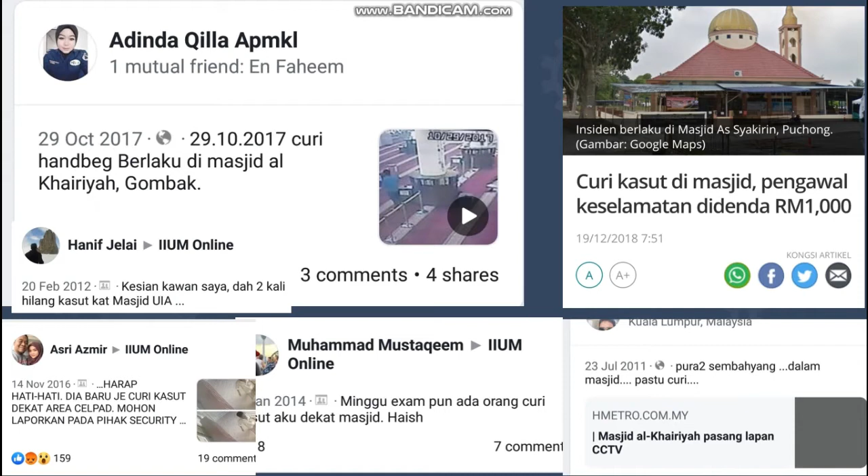Next, we move on to the next slide. This is the evidence that people always complain that their belongings got stolen. Many UIA students complain about their belongings getting stolen.

The product literature we found shows that ASRS is used to place and retrieve loads. It can also move in three-dimensional lattice structures. It is also more efficient and faster.

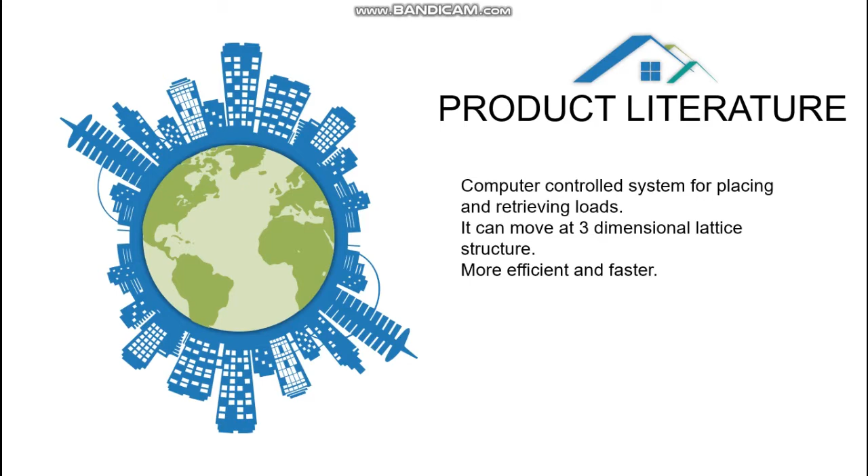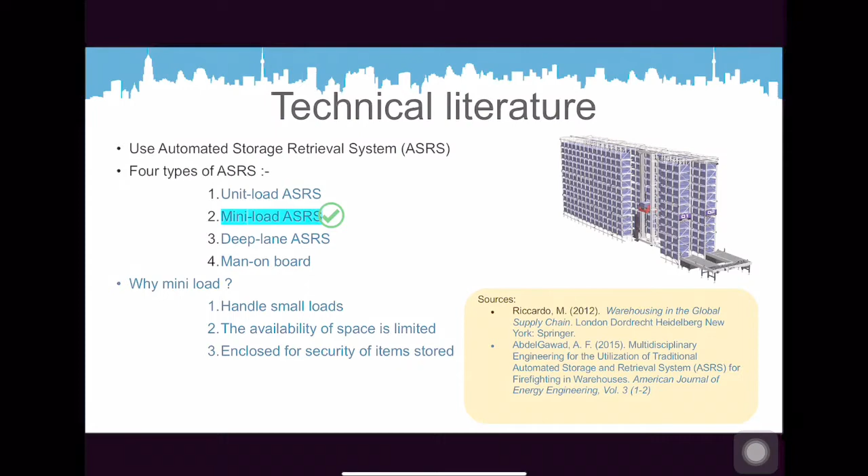Now I will explain about technical literature. The concept we found is automated storage retrieval system, ASRS, and there are four types: unit load, mini load, deep lane, and man on board. We use mini load because our product only handles small loads, the availability of space at mosques is limited, and it encloses the items for security.

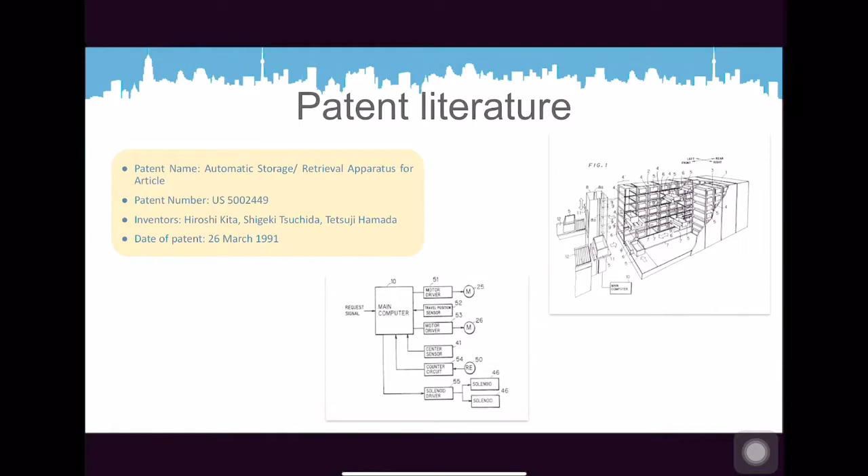Next is patent literature, and the patent name is automatic storage retrieval apparatus for article, and these are the designs that they have used. In this patent is an adjustable storage rack, and it uses a forklift mechanism.

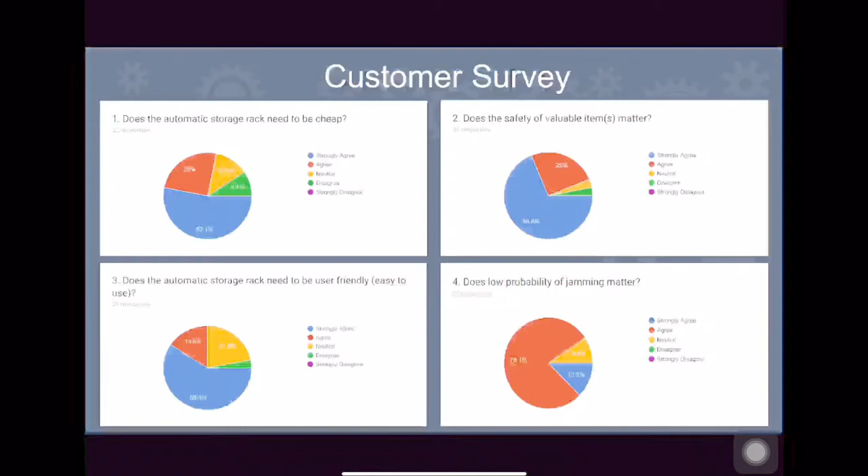Moving on to the problem statement. People going to the mosque need to keep their belongings through a keyless and systematic storage rack because there is no secure storage rack provided at the mosque.

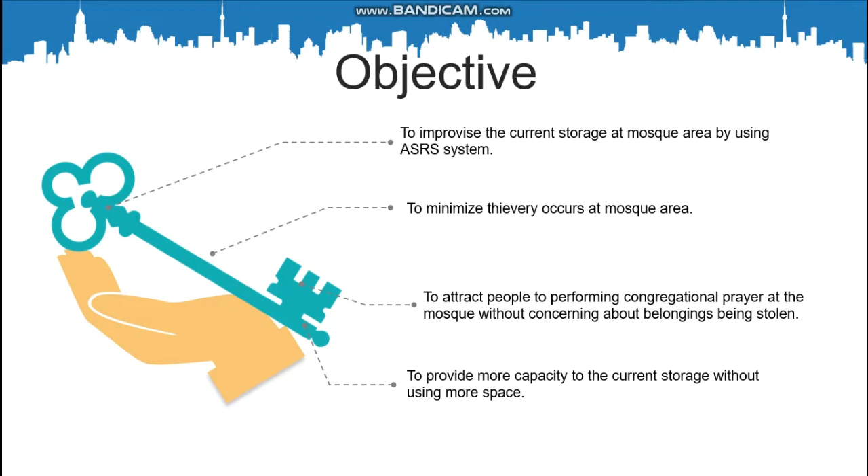The objective of our project is to improvise the current storage at the mosque area by using the ASRS system, to minimize thievery occurring at the mosque area, to attract people to perform congregational prayer at the mosque without concern about their belongings being stolen, and to provide more capacity to the current storage without using more space.

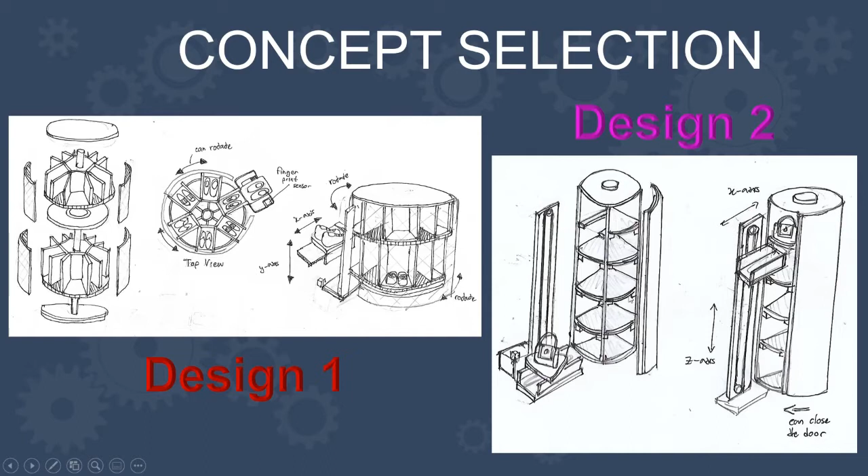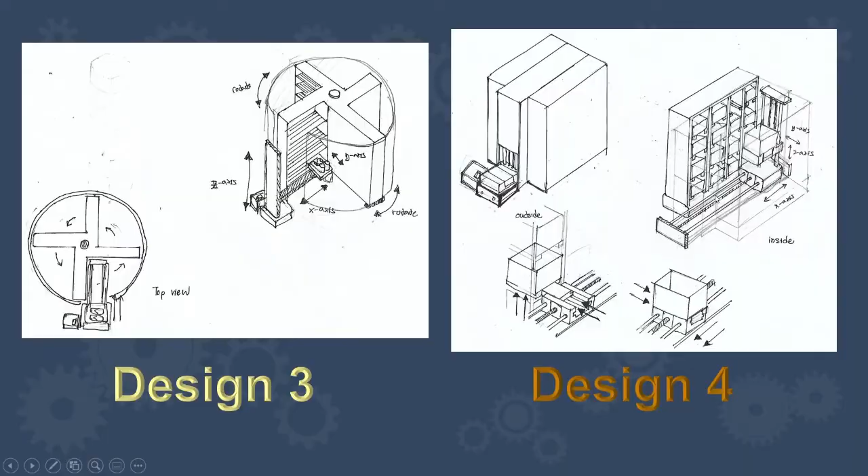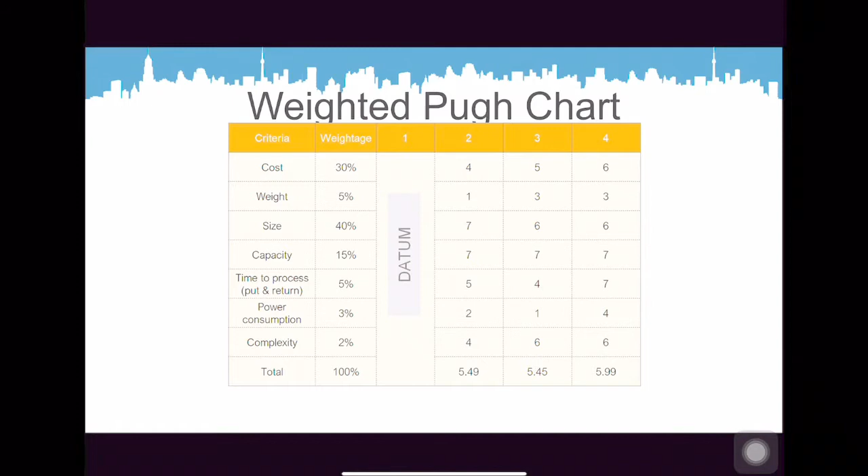Next is the weighted Pugh chart. These are the criteria we want: cost, weight, size, capacity, time to process, power consumption, and complexity. We use concept 1 as the datum, and after calculating, design number 4 has the highest number. So we came up with design 4 as our final design after the chart.

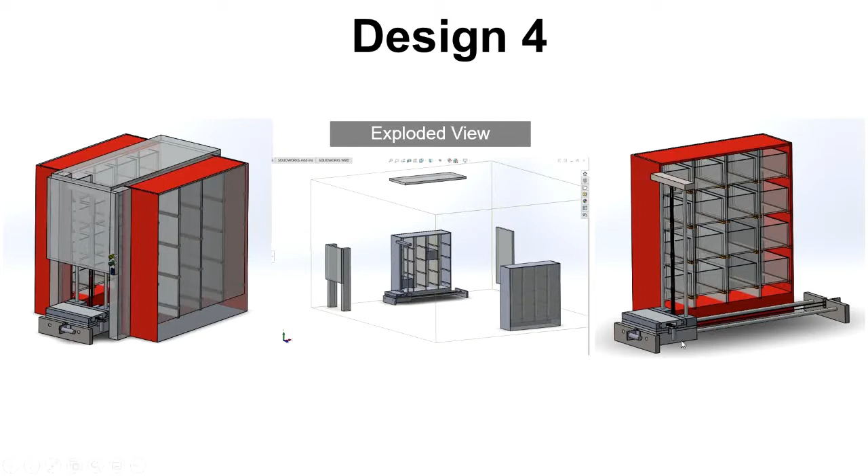So this is the actual view of our product, the automatic storage rack. It has two different racks to store, left and right, and this is the exploded view, and this is the inside view, where we see how the main platform moves horizontally and vertically to keep the box in the rack to store the item.

Next, the engineering characteristics that we need to take care of for our product. First is the dimension of the storage box. The dimension should be adequate to store the large items in the rack.

Next is the operation speed. The operation speed should be fast to store and retrieve the items.

Next is the torque motor. Torque should be able to store the item that we need to store. And then the cost should not be too expensive for the user.

Next, the power consumption should be enough for supplying our automatic storage rack. Then next is the sensor sensitivity. The sensor should be sensitive for the platform to move and save the item in the correct place.

And then the jam probability should be avoided by our products. And the life expectancy should be long because the automatic storage rack will be used for 24 hours.

Then the weight should not be too heavy because it will ease the user to change the place for the rack.

And then the material toughness should be strong because we need to keep the item safely from the thief.

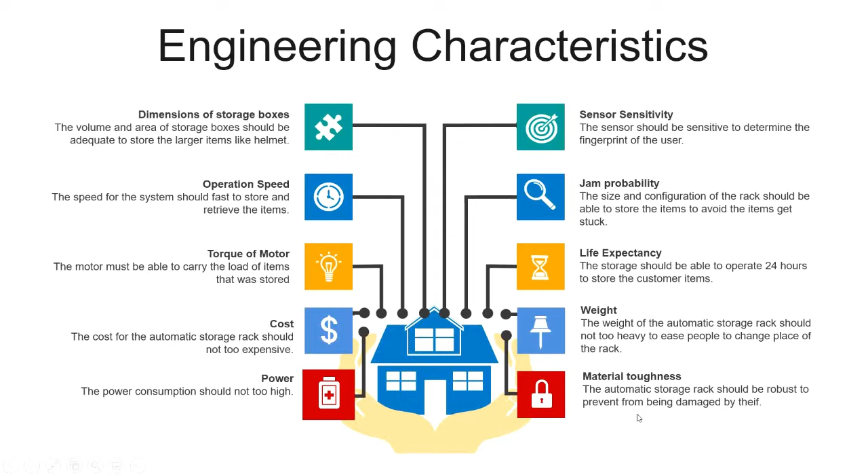So the product design specification: the first one is the weight of our product must be medium, and the second one is operating speed, also medium, and the third one is operating times, which is 24 hours, voltage low.

Capacity: we know that we must provide large space to get more capacity. And next one is accuracy. The accuracy of our product must be high, so no more problems occur in the future.

And next one, the lifespan of the product must be high, and the safety aspect that we put on our product is RFID card. And the next one is performance, must be quick response and high reliability, so that our product is efficient. And next one is special features, which is keyless, and we also use IoT, Internet of Things.

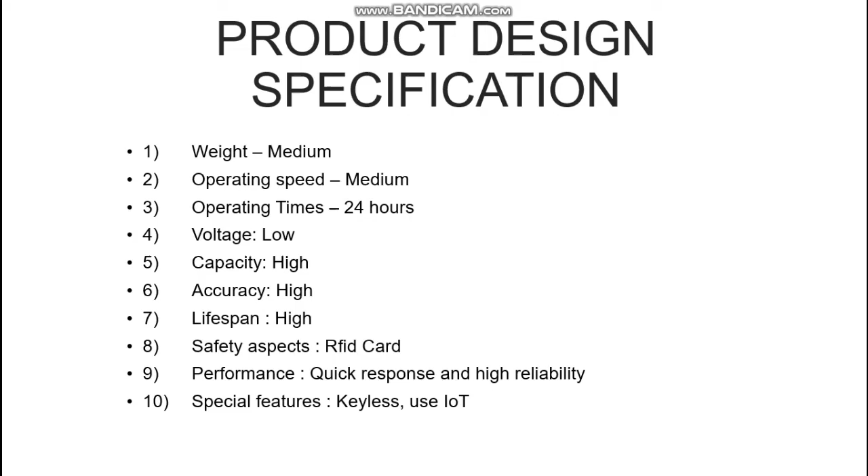For the modeling, first we try to model how the main platform moves horizontally and vertically to keep the item in the storage rack.

First, for the horizontal axis, we find the torque required, and this is after we derive all the formula, and then you will get this formula for the horizontal axis.

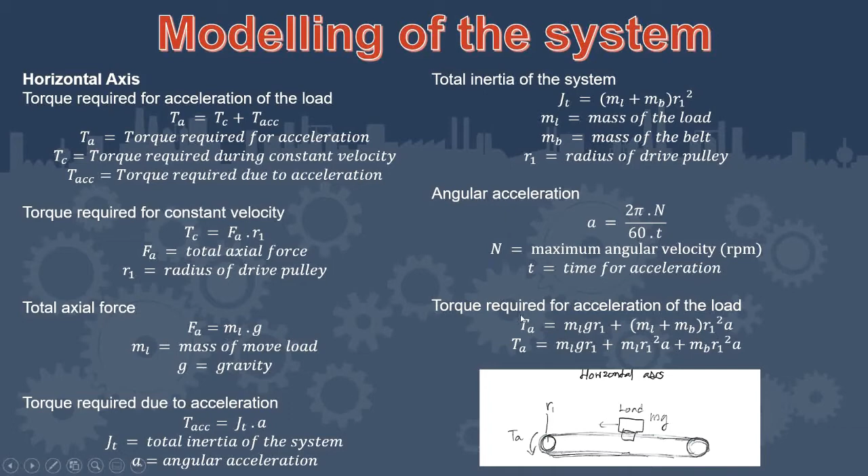Same goes for the vertical axis. We also derive the same as the horizontal axis, and this is the formula for the vertical axis.

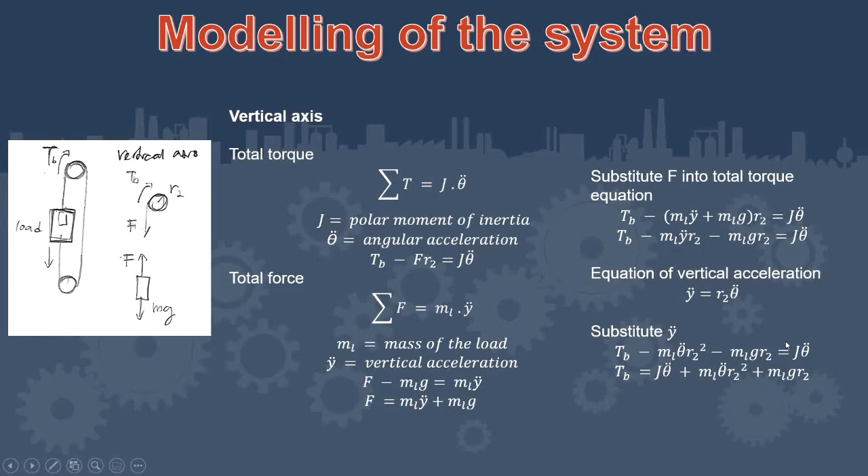Then we calculate the torque needed for the motor to rotate and to move the main platform. First, we determine the mass of the load.

The maximum mass that the platform needs to move is 5 kilograms, and the mass of the belt is 0.5 kilograms. The radius of the drive pulley is 0.0125 meter.

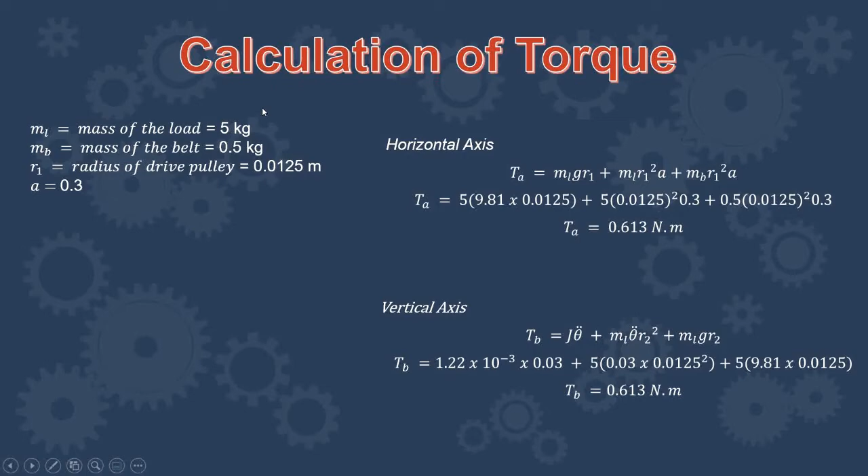For the horizontal axis, we got the torque needed is 0.6 Newton meter, and also for the vertical axis, 0.613 Newton meter, because we assume that both axes need the same amount of maximum load, which is 5 kilogram.

Okay, next we calculate how to choose a motor selection for the belt driver. First, same as before, the maximum load mass that we need to move is 5 kg, and the cylinder mass 1 and mass 2, left and right, is 0.1 kg, and the diameter of cylinder left and right, also the same, which is 25 mm.

And then the mass of the timing belt can be neglected because I think it is not too heavy for the motor to rotate. Next, we calculate the motor shaft conversion load of inertia, then we get 7.96 times 10 to the power of negative 4 kg meter squared.

Then calculate the load torque calculation, which is 0.613 Newton meter, and then calculation of rotation speed, which is 1440 rpm. Then for motor temporary selection, we use motor 1 Newton meter times 0.8, we get higher than 0.6131, which is the load torque calculation here.

So we can use a 1 Newton meter motor.

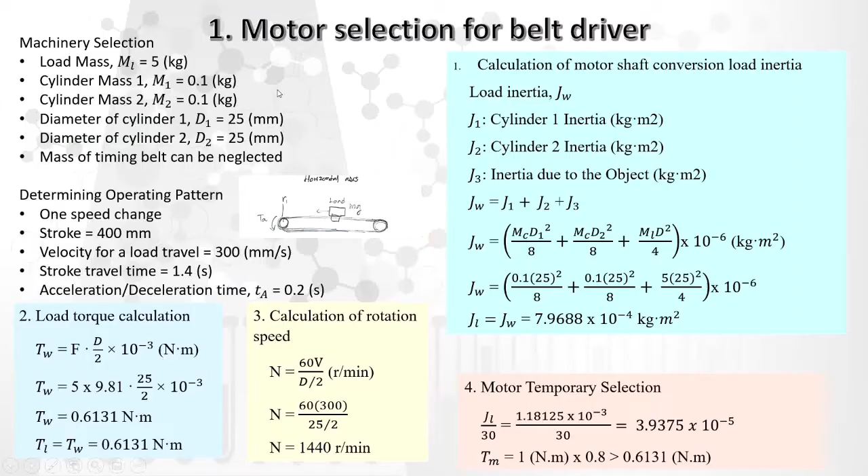Next, then we calculate the acceleration and deceleration torque. Then we get 0.6102, and then lastly, calculation of maximum momentary torque, effective torque. Then the total RMS torque is...

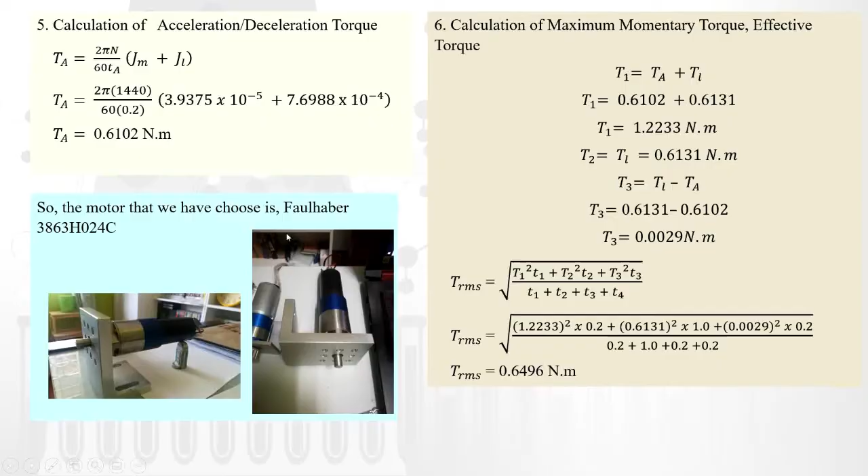0.6496 Newton meter. So with this value, we use the motor that we choose, which is Faulhaber 3863H024C. So this is the data sheet of the motor for Faulhaber 3863H024C.

We see here the torque for the motor is 1455 milli-Newton meter, so it is more than the 1 Newton meter that we need. So I think it's powerful enough to move the 5 kilograms load.

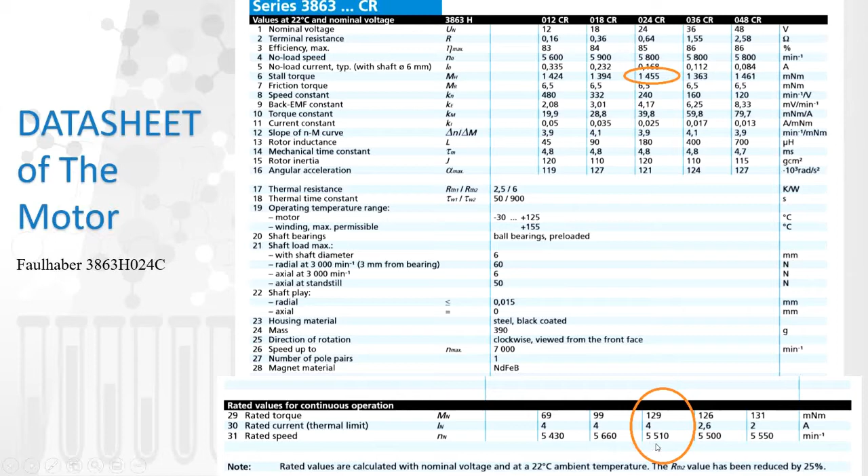And this also shows the rated torque and the rated current needed, and also the rated speed, 5510 per minute.

Next, we calculate how to determine the radius of the cylinder beam. We use aluminum alloy as a beam to support the main platform that will move in the horizontal axis. This is a two-beam setup to support the platform to move in the horizontal axis. Same as before, maximum load mass is 5 kg.

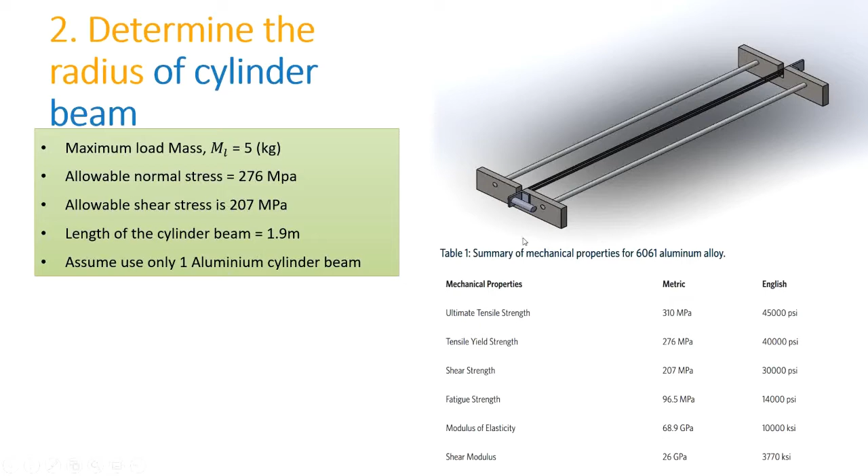The allowable normal and shear stress we find from the data here, which is the yield strength and shear strength of the aluminum beam: 276 megapascal, and shear strength is 207 megapascal. The length of the cylinder beam from here is 1.9 meter. For the calculation, we assume that we use only one aluminum cylinder beam here.

For the calculation, we calculate the points at which the maximum shear force and also the maximum bending moment happen. The maximum shear force should be at the end of the beam, and the maximum bending moment should be at the middle of the beam. For the calculation, we only calculate the static force, meaning the platform will stop at the end of the beam and also at the middle of the beam.

Why do we choose these 2 points? Because at the end of the beam should be the maximum shear force, and the middle of the beam should be the maximum bending moment. Based on these 2 points, we need to calculate and find the minimum radius required to support the 5 kg load on the beam.

So first we find the AY, BY force, and then we draw the shear force and bending moment diagram, and then we find the maximum shear force and maximum bending moment to find the minimum aluminum cylinder radius based on these 2 points. At this point, at the end of the beam, for the maximum shear force, the radius required is 3.228 times 10 to the power of -3.

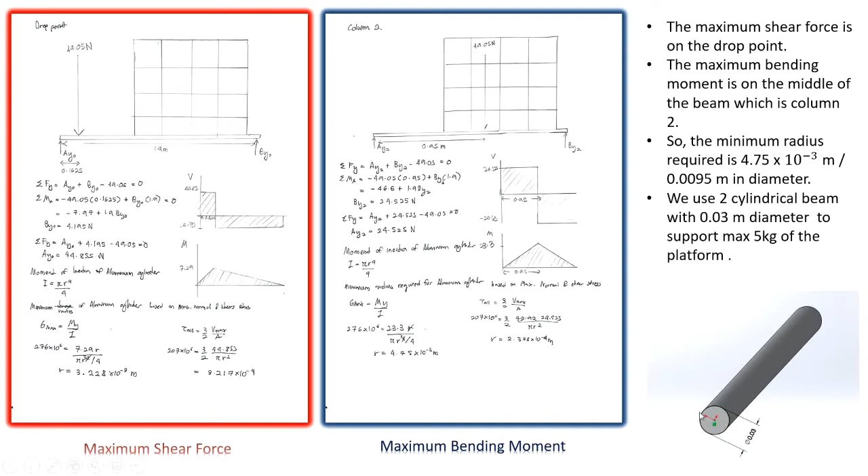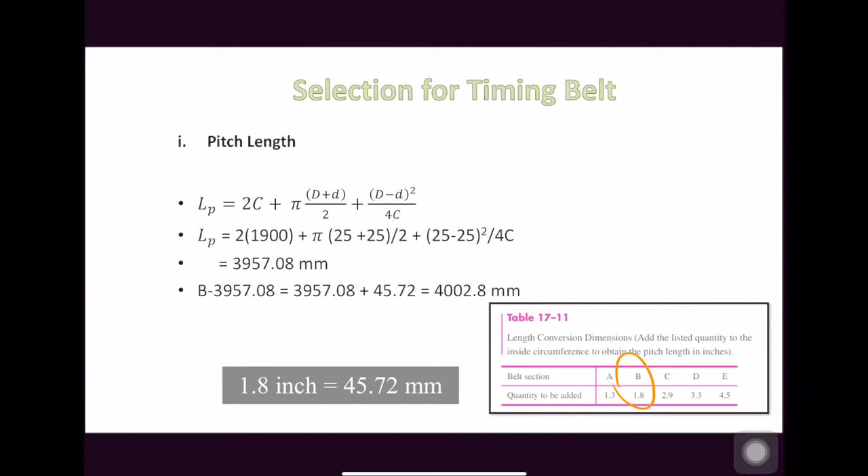Moving on to the selection for timing belt. Firstly, we calculate the pitch length. The C, large diameter, and small diameter are determined by us based on our equipment, and the pitch length that we get is 3957.08 mm, but it needed to be adjusted by 45.72 mm due to the B type belt section, as we used a medium horsepower application.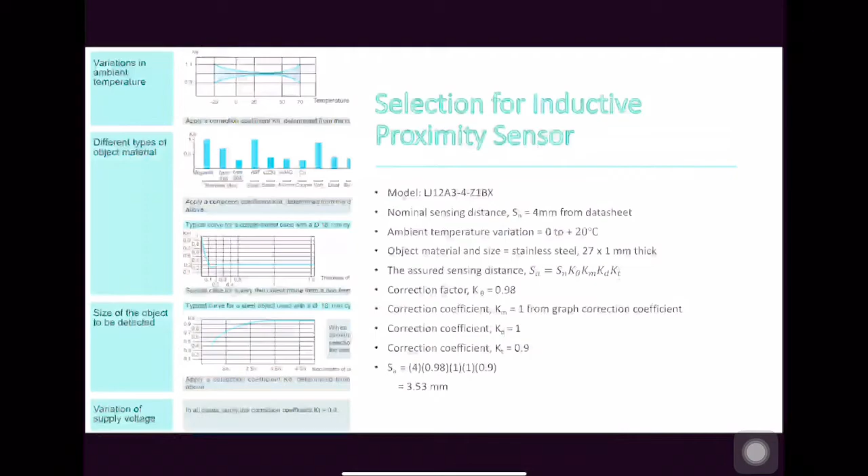Next is km equals to 1, where we get from the graph correction coefficient, because we used stainless steel material. Correction coefficient is usually kd equals to 1, and correction coefficient kt is usually also 0.9. So after calculating it, the correction of distance sensor is 3.53 mm.

Next, for power supply selection, we choose AC to DC power supply, which is a 24 volt output and 5 ampere output. The volt is based on the data sheet of the motor here. The motor needs 24 volt power to move.

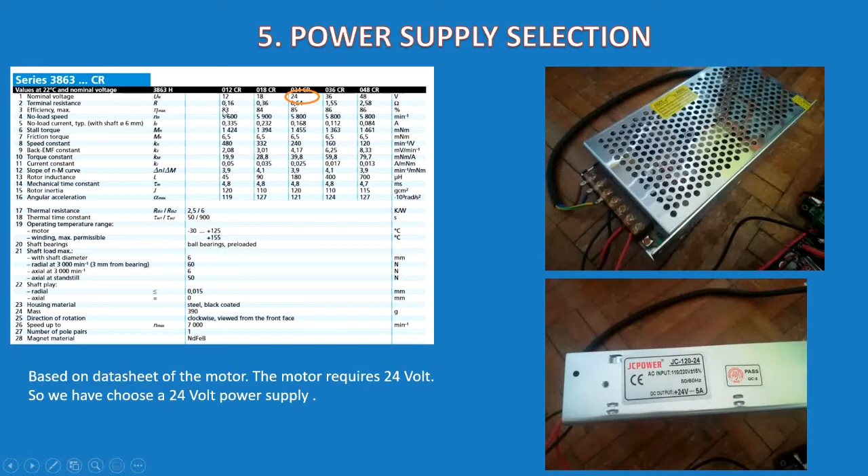Next, after we have done with the calculation, then we design our automatic storage rack with the dimension. So we can see here the outside view of the automatic storage rack. This is the isometric view, top view, side view, and front view.

From the isometric view, you can see here it has two racks that can be stored, left and right, and then it has a box here, and the user will put their belonging into the box, and then the platform here will move into the rack here.

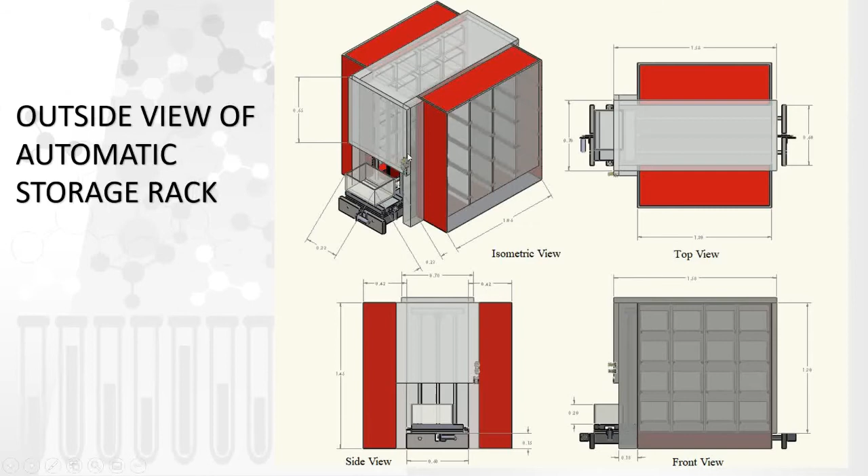This is the inside view of the automatic storage rack. You can see here this is the main platform in between the two racks that will move horizontally and also vertically. All the dimensions here are based on the calculation that we have done before.

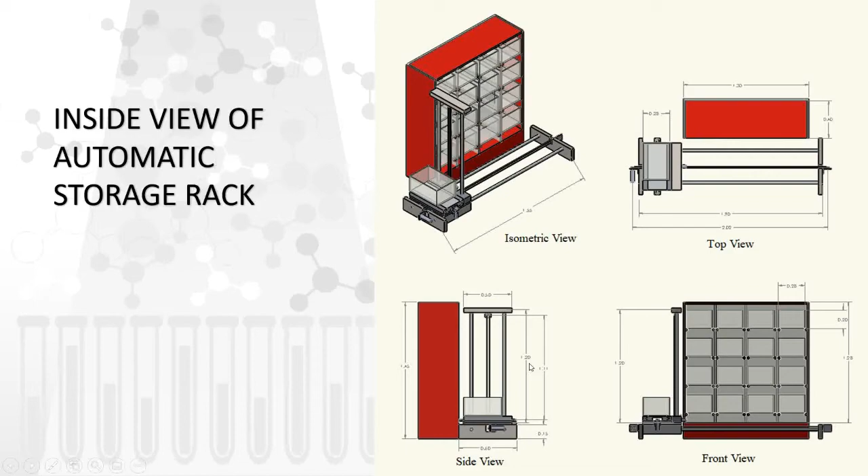Next is the components that we use for our project. First is motor A that will move the timing belt here to the horizontal axis, and then motor B that will move the timing belt here that connects to the platform, so the platform will move in the vertical axis, and this is motor C that will move the platform into the rack.

We can see here also the cylindrical aluminum beam that will support the platform, the storage rack, the storage box that will be kept in the rack, and then this is the drop point for the user to put the belonging, and then this is the save button to save the belonging, and retrieve button to retrieve back the belonging, RFID card sensor to scan the user's card.

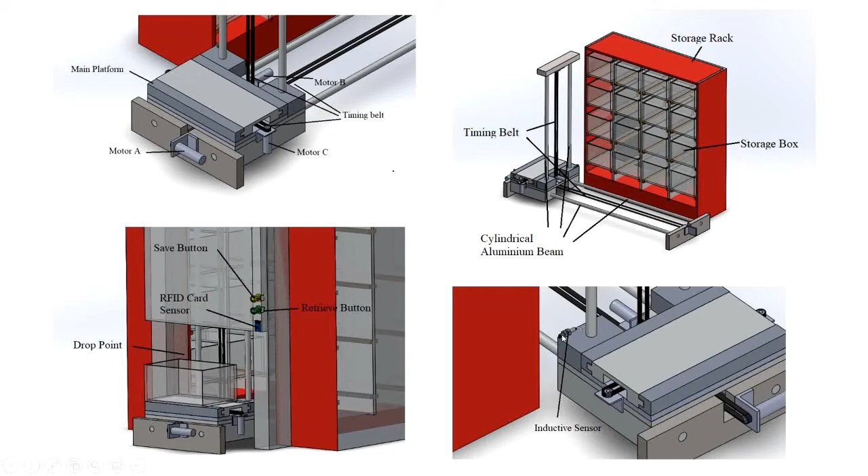And then we will put an inductive sensor on the platform here to detect the power screw at each of the columns and rows to save at the correct place.

Next, this is the progress before COVID-19. We have done some part of the platform, the rack here, and also the moving part here.

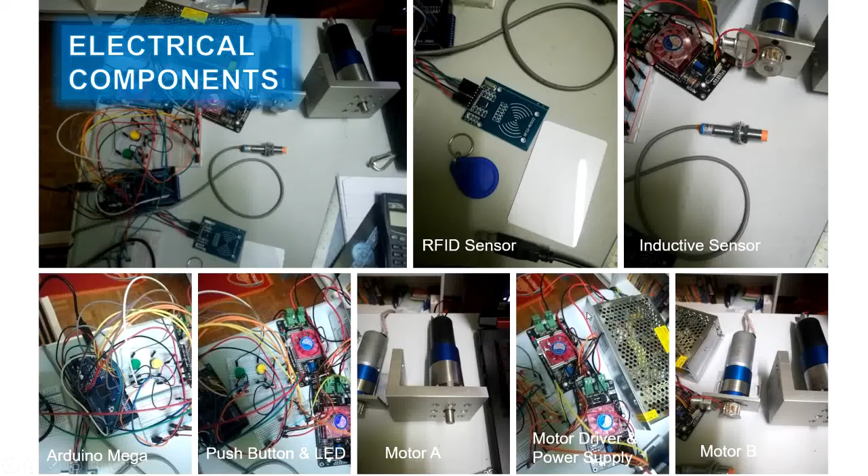And then this is the electrical component that I managed to bring back to my house. So we use the RFID card sensor, inductive sensor, Arduino Mega, push button, LED, motor A, motor driver and power supply, and motor B.

Unfortunately, I don't have motor C, so I will show you later how motor A and motor B work.

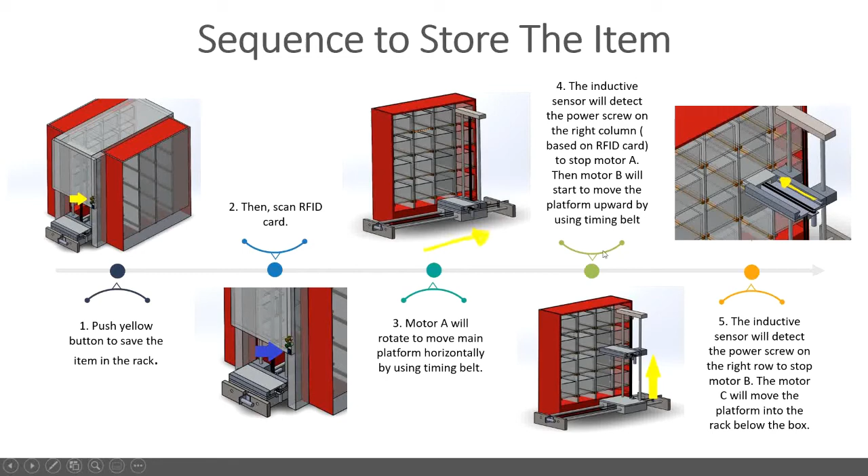Next is the sequence to store the item. For the coding part, I managed to do only how the platform here stores the user's item into the box. So all of this I will explain after this, how the platform moves to store the item in the rack.

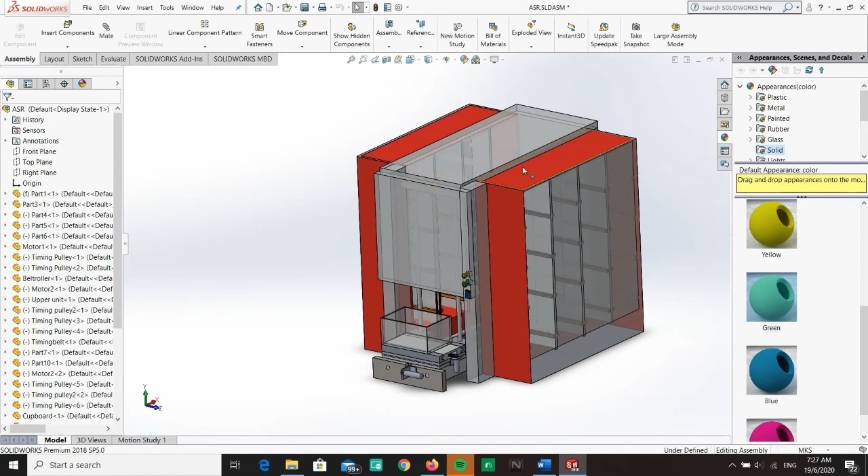This is basically our automatic storage rack system for IDP this semester. The automatic storage rack has two racks to store the item, which are in the red color, and each of the racks has 4 rows and 4 columns to store the box like this in each of the cells in the rack.

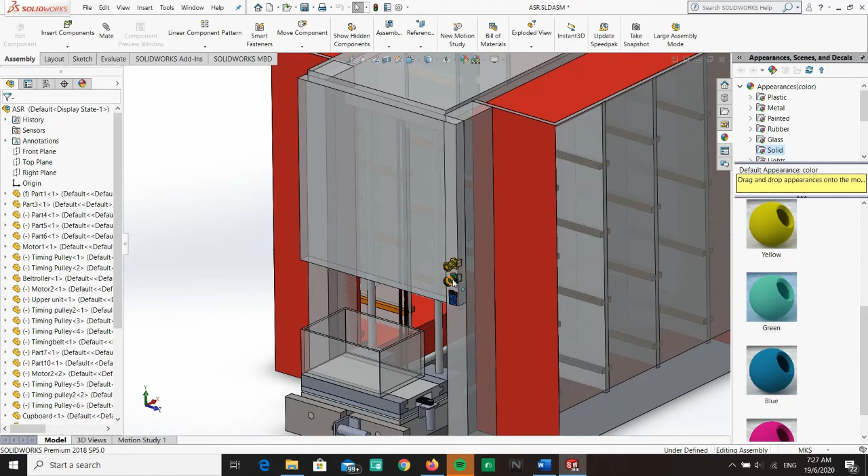Next, the automatic storage rack has 4 inputs. For now, it only has 4 inputs, which are the yellow push button to store the items, green push button to retrieve back the item, and the RFID card scanner to scan the RFID card.

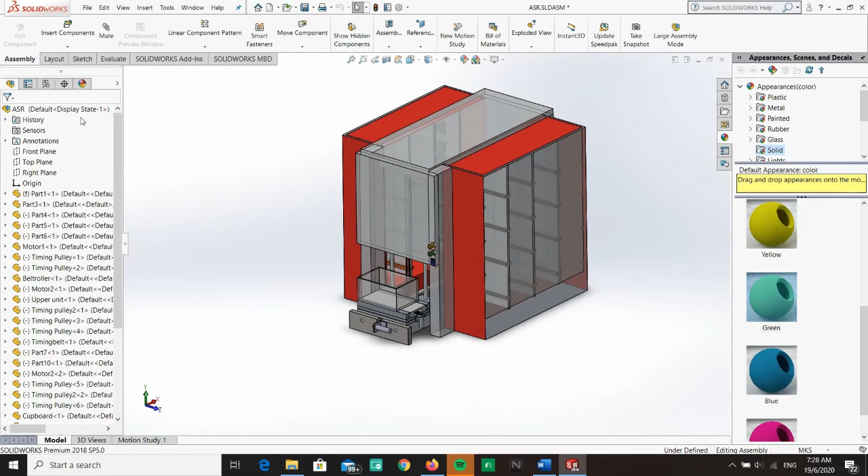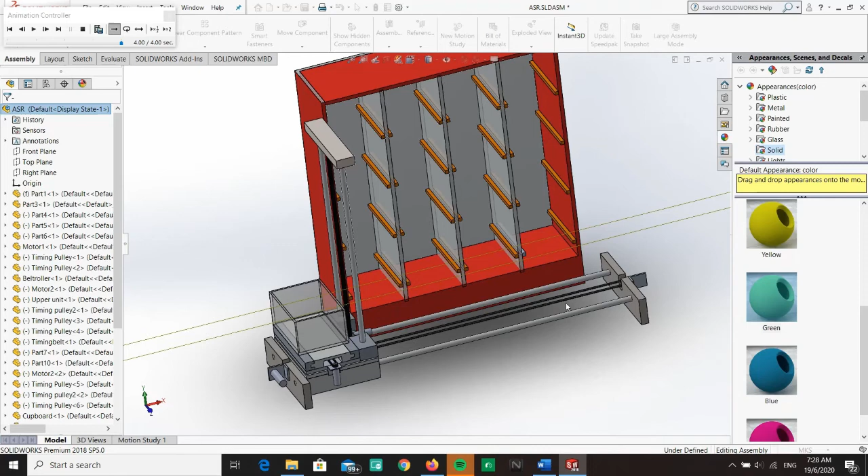And lastly, the inductive sensor to sense the metal or the power screw that we will put on each row and each column to make sure of the correct place for the platform to store the box.

And in the middle of the automatic storage rack, there is a main platform that will move horizontally or x-axis, vertically or y-axis, and lastly z-axis that will move into the cell in the rack.

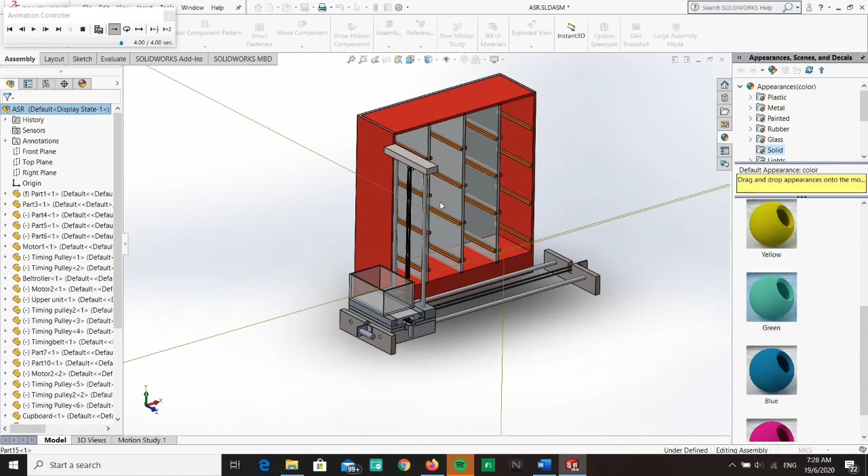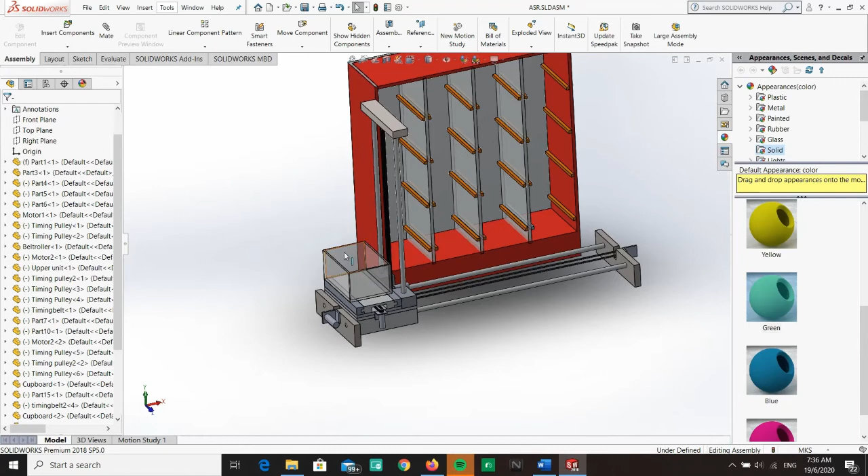So how the main platform works is very easy. For example, the user wants to store the box in the third column and third row. After the user puts their belonging into the box and pushes the yellow button to store the item and scans their RFID card...

First the platform will move horizontally to find the right column by sensing the metal or the power screw in each of the columns here using the inductive sensor.

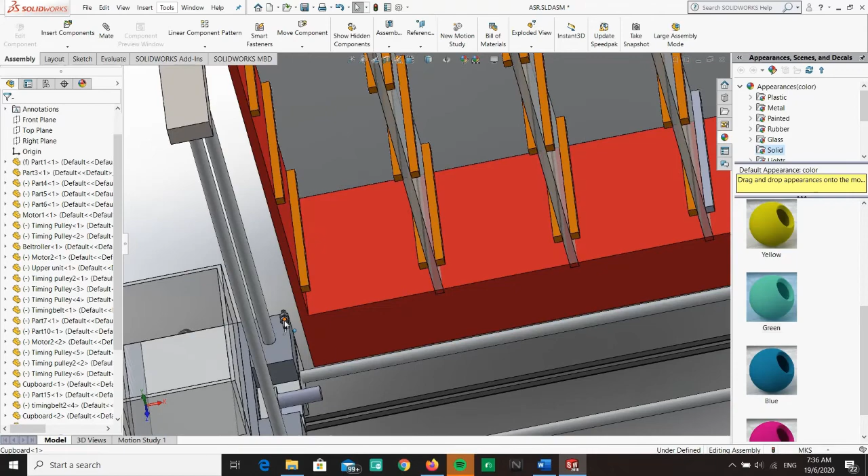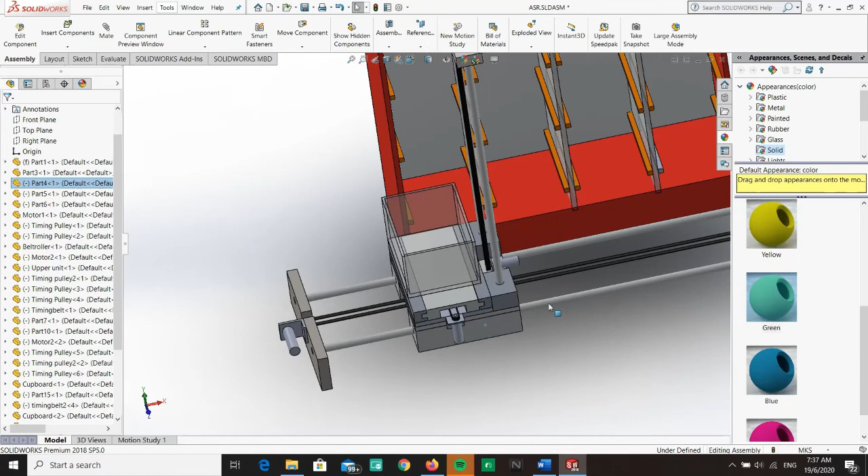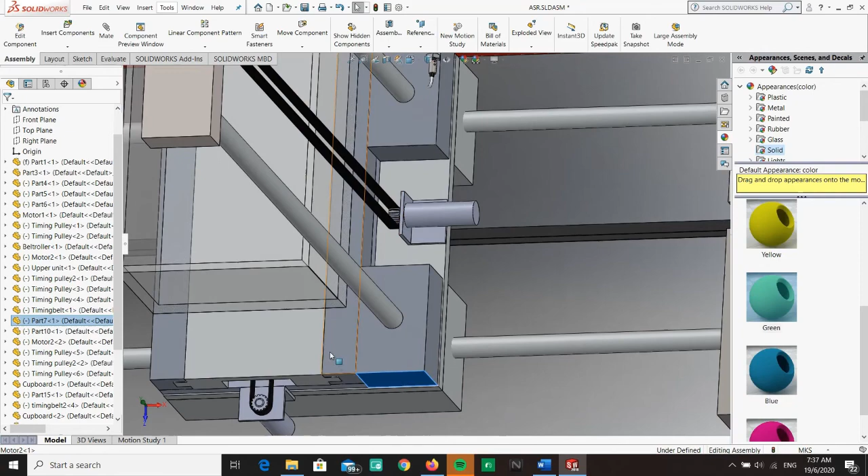So the motor here will move the platform horizontally in the first column. It will sense, the inductive sensor will sense the screw at the column, but we won't stop here because we want to store in the third column, so it will still move until here. After the inductive sensor senses the power screw here, the motor for the x-axis will stop. Then the motor for the y-axis will start to move to find the third row.

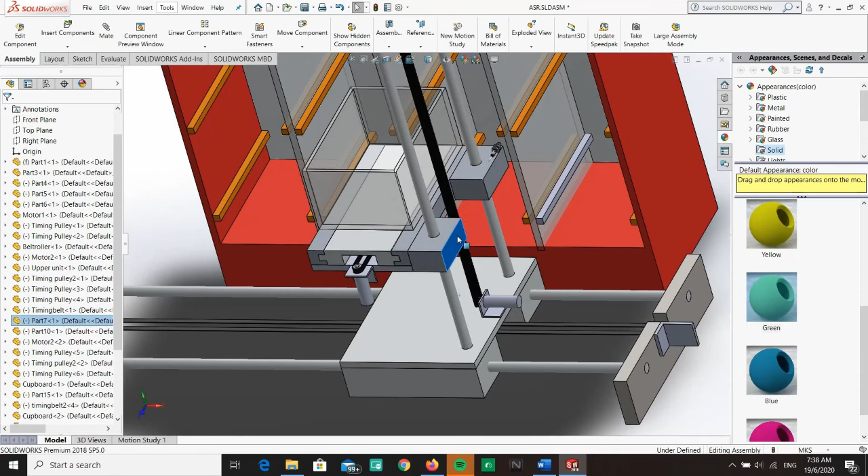Same goes for the row. The inductive sensor will sense the power screw in each row until the third power screw is sensed by the inductive sensor, so the motor for the y-axis will stop.

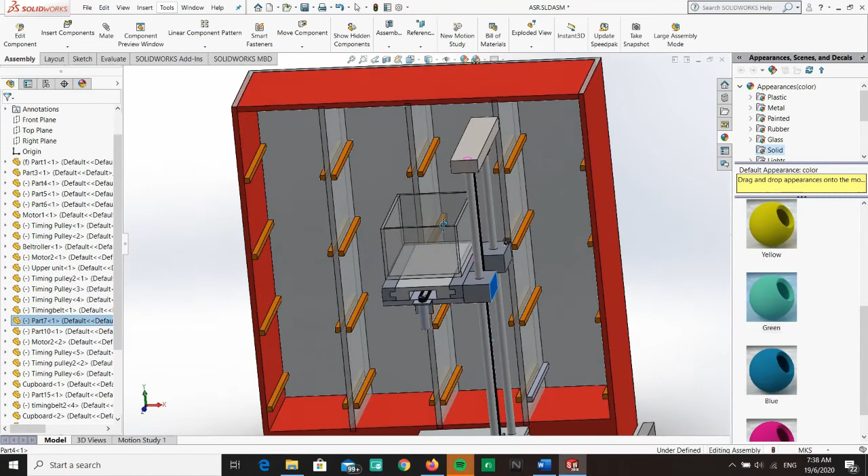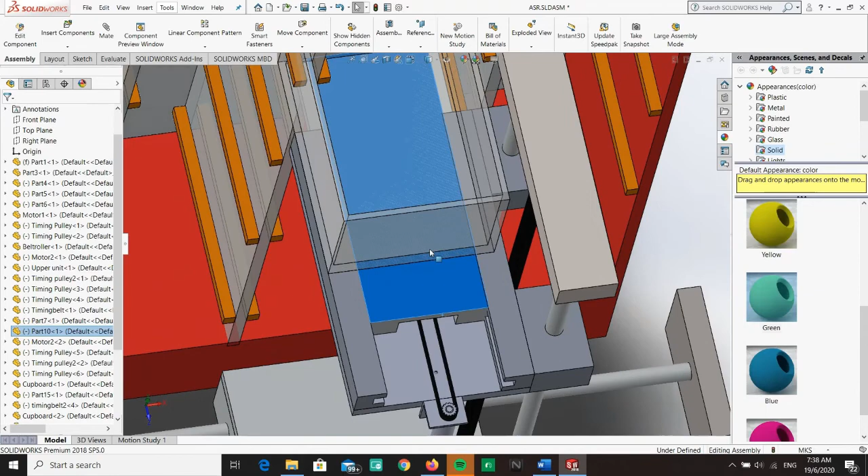Next, the motor for y-axis will go up a little bit, and the motor for the z-axis will move and push the box into the cell like this. And then the motor for the y-axis will go down and put the box in the right cell.

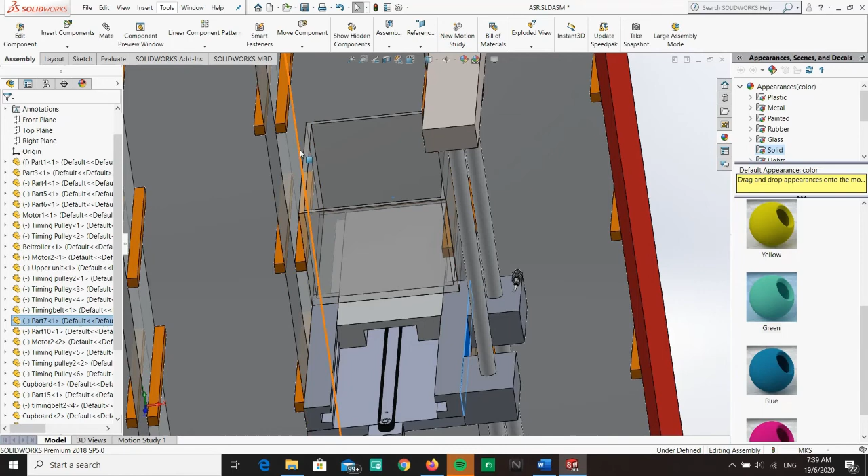So for more understanding, I will show you a simulation with the electrical part to store the item in the third column and the third row.

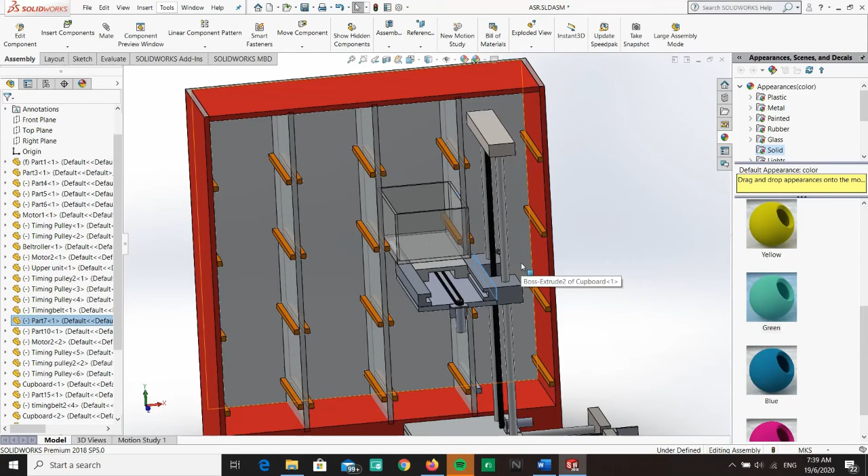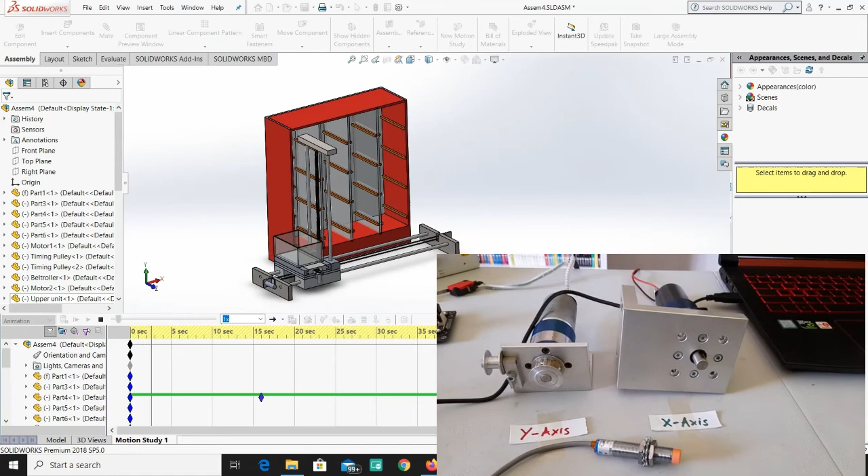Firstly, to store our belonging, we push and hold the yellow button and then take an RFID card and scan it. The x-axis will start to move, and then the inductive sensor will sense the screw for the first column, second column, third column. The x-axis will stop and the y-axis will start to move, and it senses the first row,

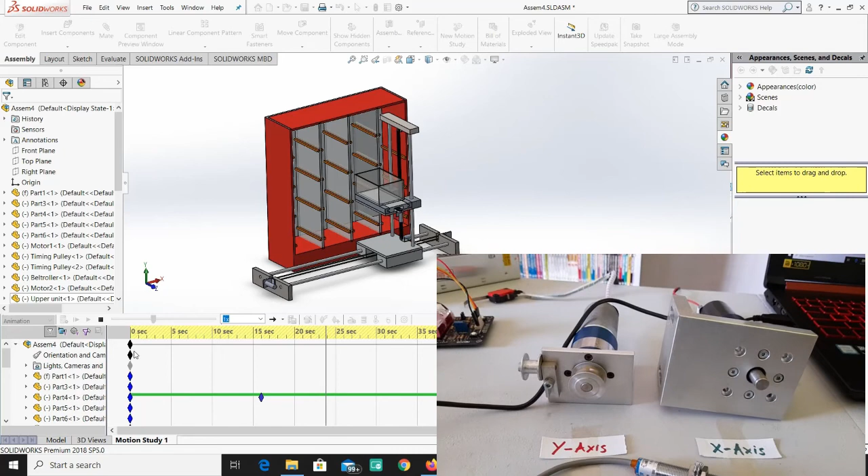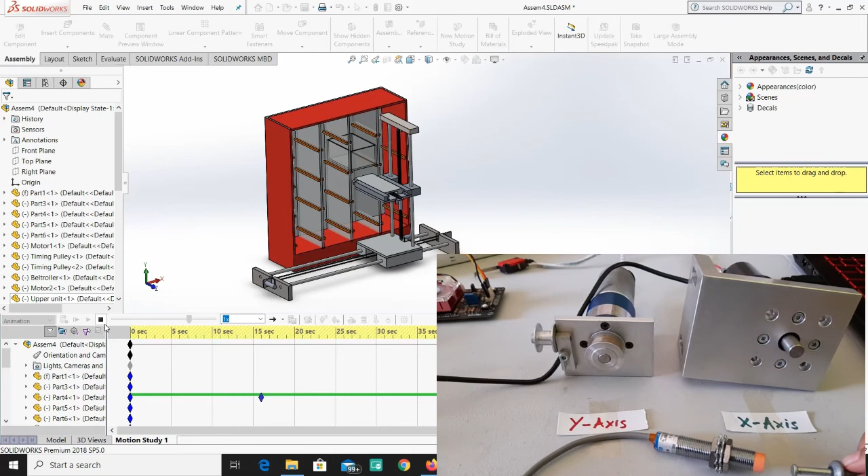second row, third row, and the y-axis stops. Unfortunately, we don't have the motor for the z-axis, so we only show y-axis and x-axis only. And then the y-axis will start to go down, and it will sense the third row, second row, first row, and the x-axis will move to go back to the origin, third column, second column, first column, and then it will stop.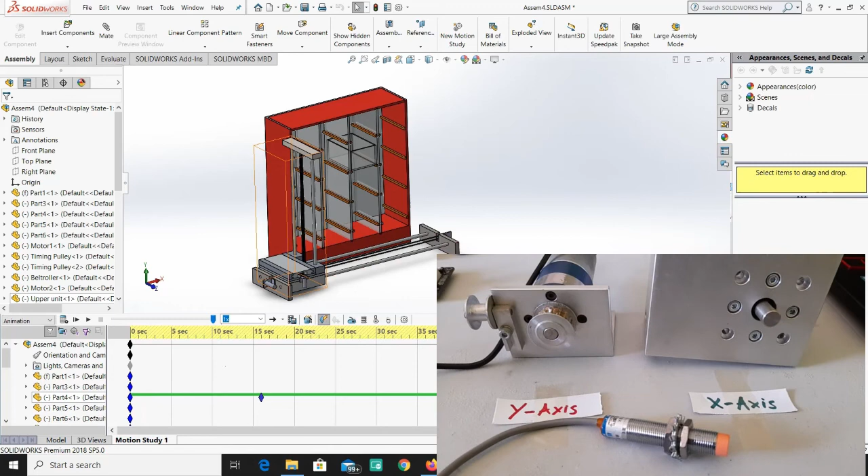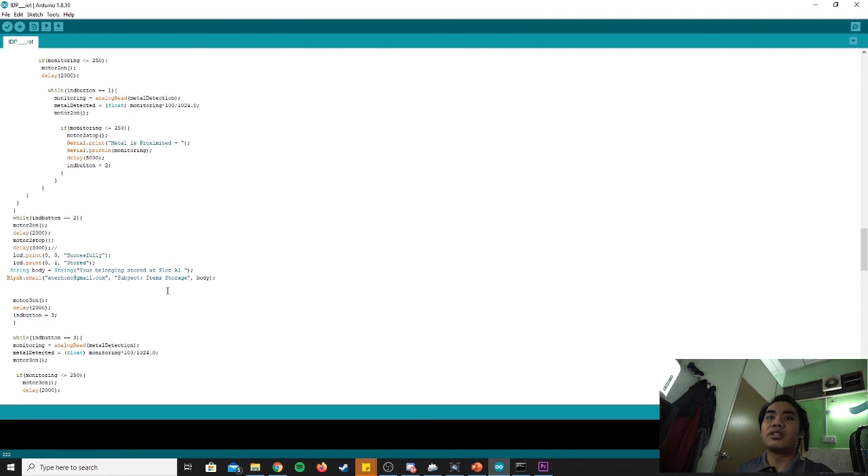This is for when we start our product, we will receive the email like this: welcome to automated storage rack. And also when we push the button, the yellow button, we will receive a notification to our apps, to our phone, that says storing in progress. And also when the belonging is reached at the particular slot, at certain slot, we will receive the email that says your belonging stored at the slot. So that's all for.

So right now I would like to show a simulation about how our program works. So this is our layout, our design. Since the software doesn't have an RFID card, this is the thing that I managed to do. So we will look at what happened to this application when I press this button, when I start the simulation.

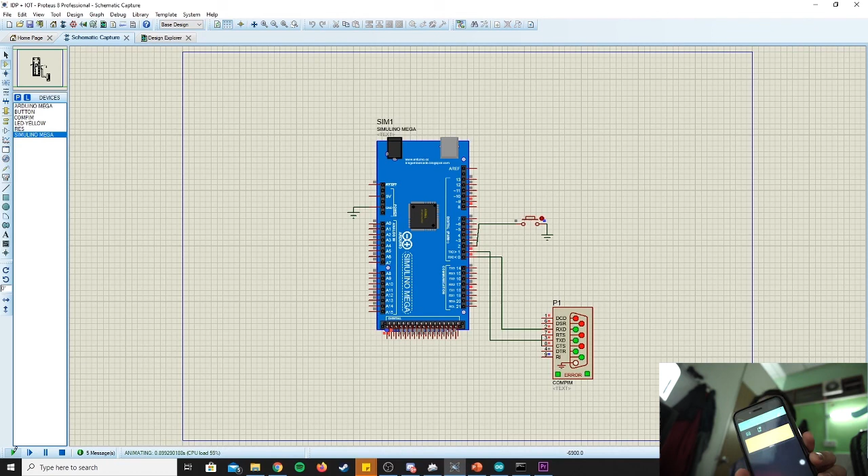The application says that when the application is online, we receive the LCD saying automated storage rack, and also we will receive the email, a welcoming email, saying welcome to automated storage rack.

And when I press this button, our program will do the simulation, and we run the coding, and also the belonging we store at the place. Since there is no RFID card, I just can say like that. So when the item is stored at the place, we will also receive the email.

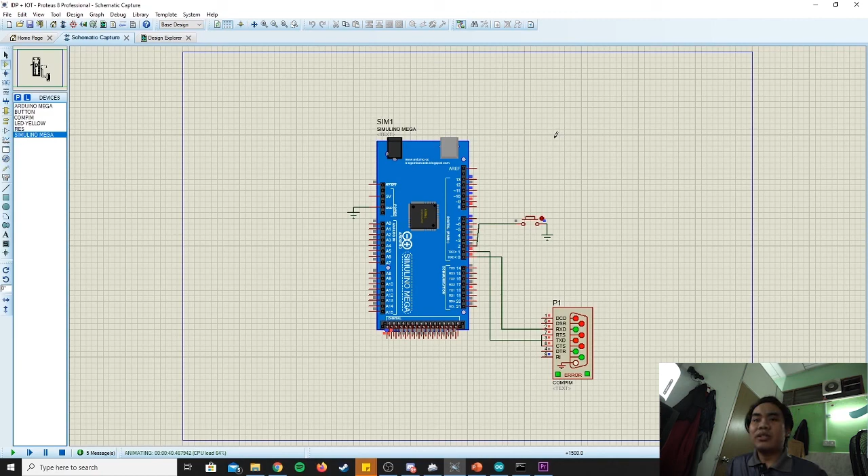For some reason, I only receive the email for... Okay, I hope you can understand what we have presented to you for presentation 1 for IDP this semester.